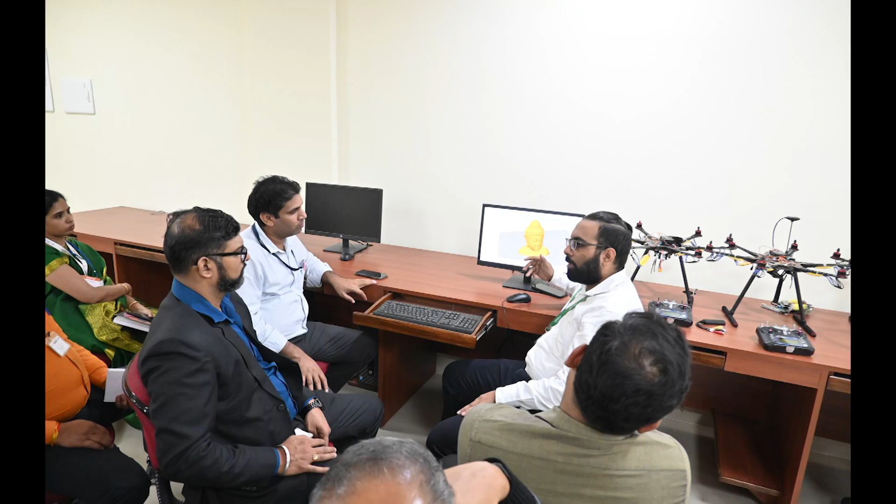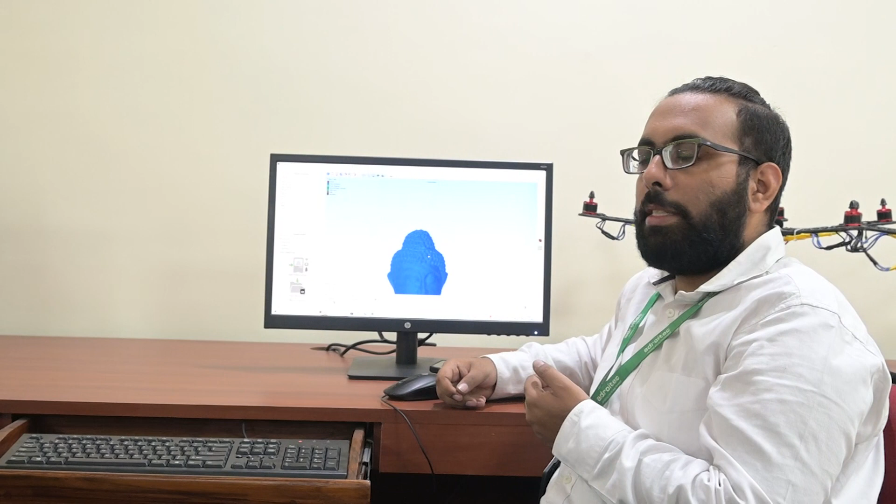मशीन में जो वायर फीड हो रही है, जनरली उसका डायमीटर होगा 1.75 mm, वो किसी भी कंपनी का हो, सभी इसी डाटा पे चलते हैं। एंड एट द सेम टाइम आपका नोजल का डायमीटर होगा 0.4 mm। क्यों? बर्नौली के सिद्धांत से, जब भी किसी चीज़ को पीछे से प्रेशर करते हैं वो छोटे डायमीटर से आउट होती है तो एक फ्लो ऑफ प्रेशर बनता है, अदरवाइज एक कंसिस्टेंसी फ्लो में नहीं रहेगी।

तो आपके पास एक ऑप्शन है मशीन टू मशीन, इस मशीन में 0.05 यानी 50 माइक्रॉन्स टू 0.32 तक आप प्रिंट कर सकते हैं। बेसिकली इसका मतलब ये 500 लेयर कंप्यूटर ने खुद डिसाइड की है। उसने कैसे किया, मैंने इसकी कैलकुलेशन बताई। हम लोग जानना चाहते हैं कि इसके लिए हम इनपुट देंगे कि डिजाइन में वो अपने आप से ले लेगा। अगर आप देखिए ये पार्ट है आपका।

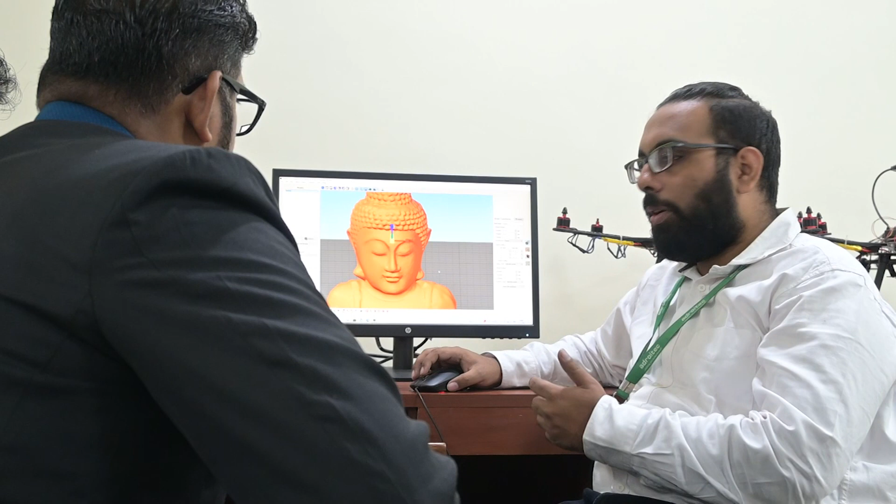जेड में ये कितना है सर? 90। ठीक है, इसको इन्होंने 0.2 से डिवाइड कर दिया, 458 समथिंग उतनी ही लेयर हाइट्स थी उसके अंदर। उसने उतनी mm की हमने लेयर हाइट दी थी, उससे डिवाइड किया तो उतना नंबर ऑफ लेयर्स आ गए।

अब मैं अगर इसको और फाइन में करना चाहता हूँ तो क्या करूँगा, यहाँ आऊँगा, मेरे पास ये लेयर हाइट का ऑप्शन होगा, मैं इसको सबसे कम करूँगा 0.05। लेयर हाइट कम होगा तो टाइम बढ़ जाएगा, पार्ट की फिनिश थिकनेस कम हो जाएगी पूरी लेयर की। अभी डिपॉजिटेड रेट तो सेम है, लेयर हाइट कम करने पे ज्यादा लेयर हो जाएंगी, करीब 2000 लेयर हो जाएगी।

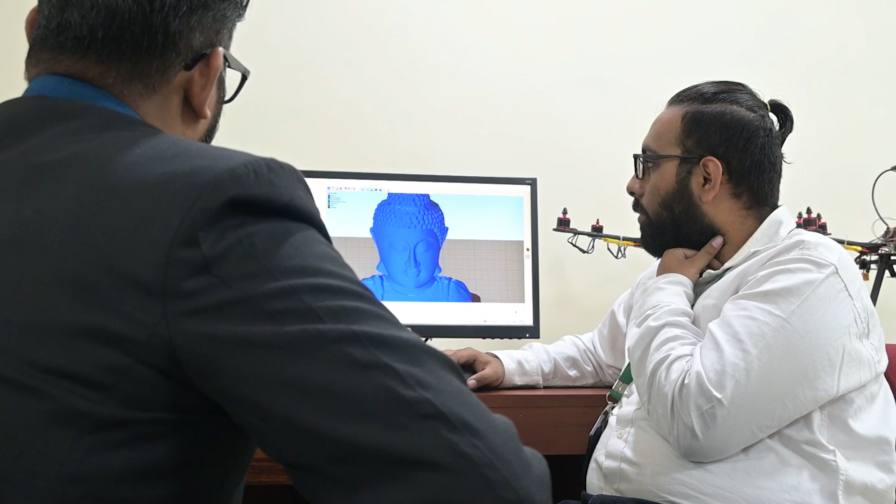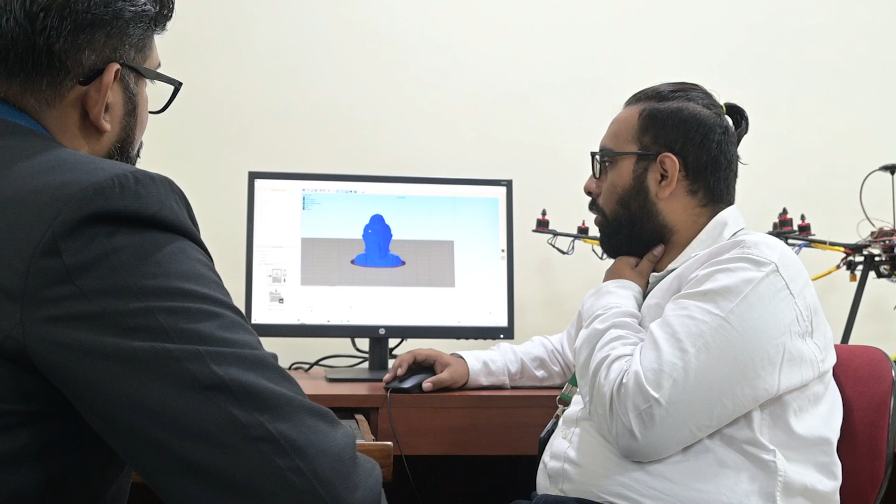मैंने थोड़ा सा वेरिएशन दिखाया। अगर इतना जल्दी करना है तो लेयर क्या है, अगर बहुत ध्यान से फोकस करके देखोगे तो आपको लेयर दिखेगी, अदरवाइज 2000 लेयर नॉट विजिबल तो लोगों को अच्छा लगेगा। बट अगर आपको सरफेस की फिनिशिंग डेमोंस्ट्रेट करनी है तो इसका टाइम कितना लगेगा, 17 आवर्स। तो आपके हाथ में है कि आप कैसा पार्ट बनाओगे, लेकिन इसमें टाइमिंग ज़्यादा लगेगी।

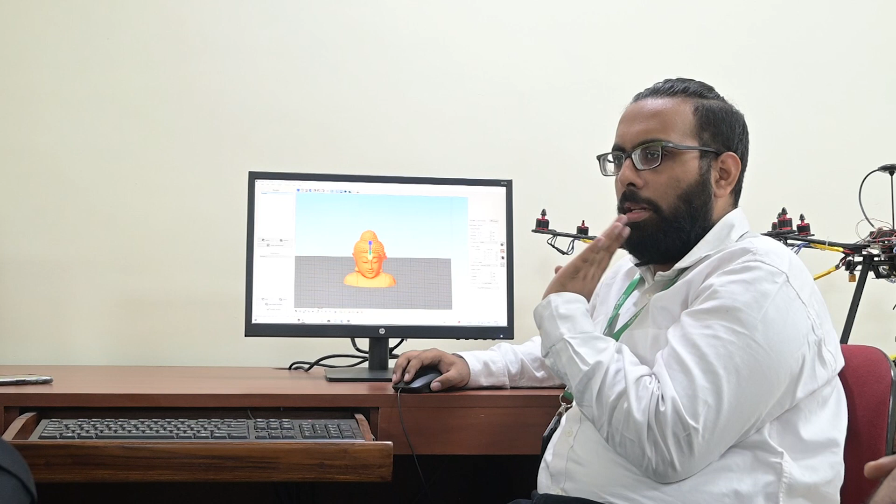लेकिन मटेरियल तो सेम इफेक्ट नहीं आएगा, मटेरियल सेम बस सिर्फ मशीन रनिंग कॉस्ट बढ़ जाएगी, थोड़ी रनिंग कॉस्ट बढ़ जाएगी और इलेक्ट्रिसिटी भी।

तो हम लोग ऐसे करते हैं 3D प्रिंटिंग में कि हम लोग एक ना बना के, मतलब इनिशियली फिनिश पार्ट ना बना के, वी विल मेक इट कोर्स। जब आपका डिज़ाइन फाइनल हो जाता है तब आप उसको फिनिश डिज़ाइन पे जाते हैं, वो हर 3D प्रिंटिंग प्रोसेस में सेम है।

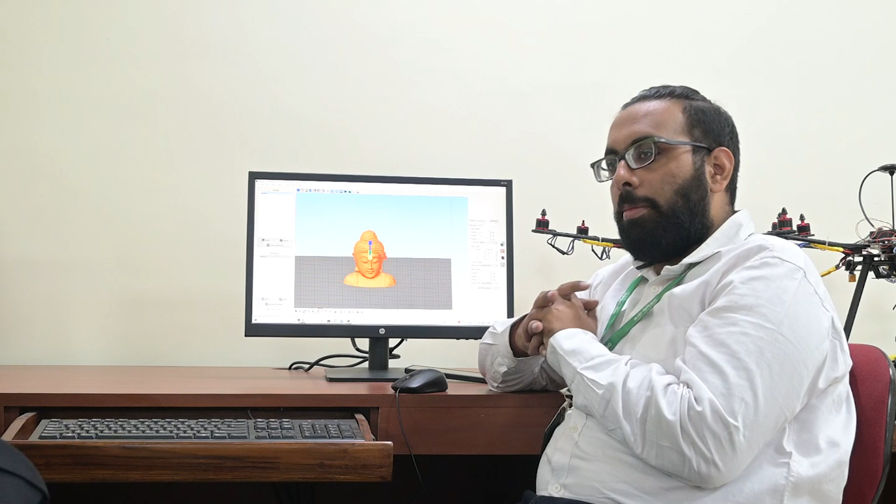हम लोग कोशिश करते हैं पहले जितना सस्ते में बन जाए, बिना ज्यादा पैसा लगे बन जाए वो बेटर है। अगर मैं अभी प्रिंट कर रहा हूँ, आप मुझसे कहते हैं कि इसके लिए माउंट बनाना है, मैंने नापा, मेजरमेंट्स करके डिज़ाइन किया, मैंने पार्ट शुरू किया, मुझे पता है अभी मेरा डिज़ाइन फाइनल नहीं है तो मैं महंगा मटेरियल यूज़ नहीं करूँगा इंडस्ट्री में, आई विल यूज़ ओनली चीप मटेरियल। वंस माई डिज़ाइन इज वैलिडेटेड, आई विल यूज़ कॉस्टली मटेरियल, आई विल मेक इट मोर टफ।

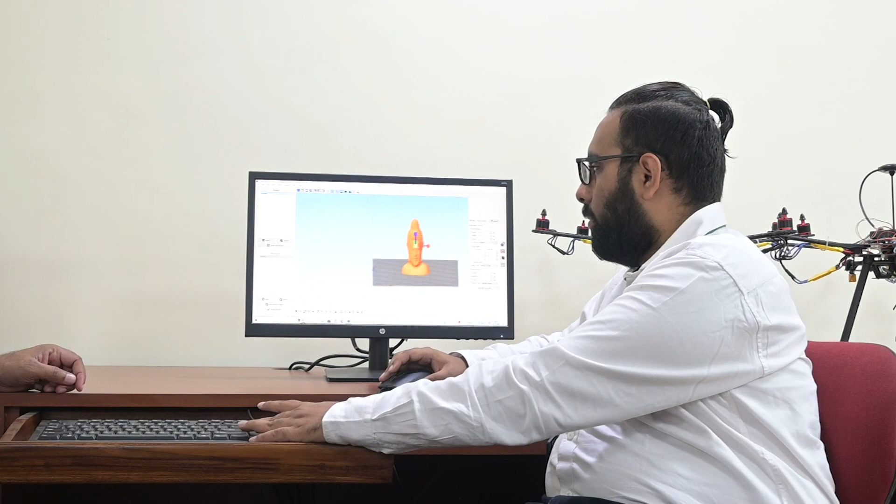इस तरीके से मेरे पास मशीन में एक ऑप्शन है कि मैं प्रिंट कैसे देना चाहता हूँ, मैं इसको रोटेट करना चाहता हूँ, मुझे ऐसे प्रिंटिंग चाहिए। बट अब इसमें इशू क्या होगा, इस पार्ट में भर के सपोर्ट्स होंगे, ये सारा पार्ट होगा।

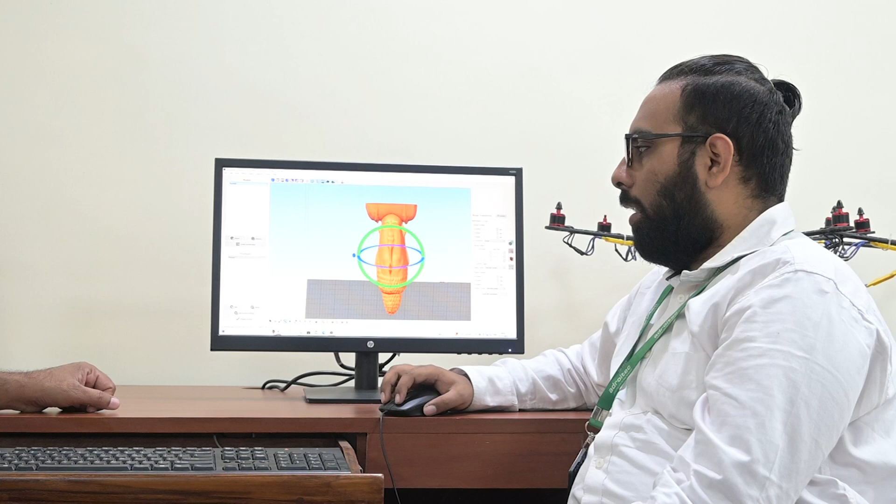सर ये तो पूरे जीरो हो गए। तो अगर मुझे नहीं पता कि ये लेगा या नहीं लेगा, मैं एक बार चेक कर लूँगा।

सर ये कुछ बिल्डिंग्स की उल्टी बनी होती है, पूरी बिल्डिंग, तो वो कैसे बनती है, किस बेस पे बनती है। रूफ जैसा जो बेस है वो रूफ जैसा बना दिया रहता है और ट्रायंगल शेप का नीचे होता है।

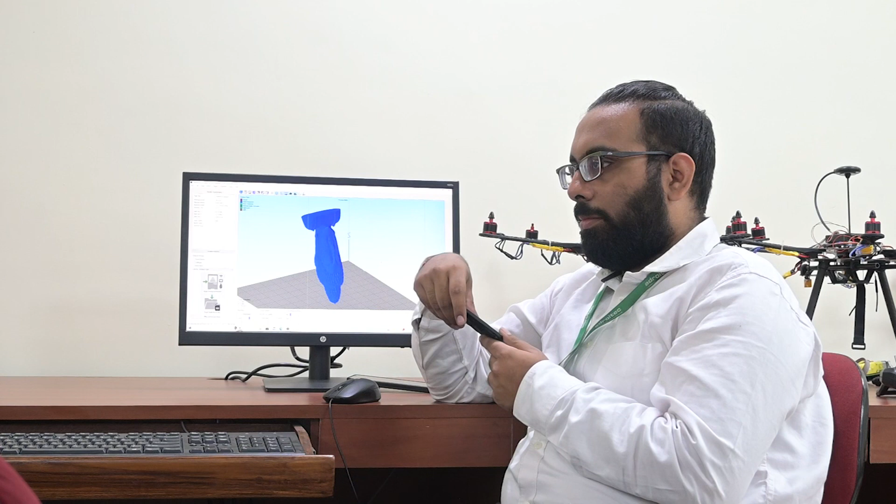Nowadays some softwares are there which will be helping us to identify the malfunction of the design over a period of time. So is it possible along with the current technology?

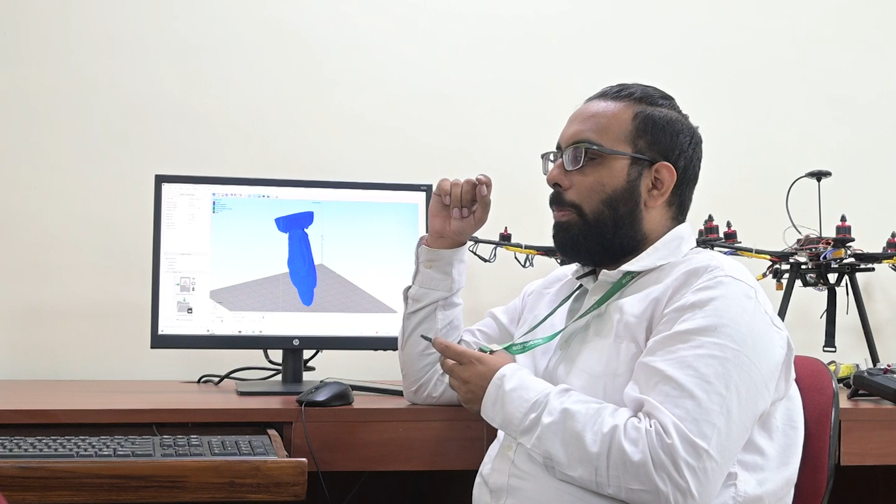Mam, 3D printing, yes it's possible. You should be aware of what the part's property is. If you can know the exact property of that part, generally when we print in metals, we print tensile bars, we print compressive samples, which you can test side by side to find its strength. If we put those values inside the software, we can get the same results, that this much pressure will be there on daily basis. So those software can predict.

Is it available with this structure? Not this one, but some softwares are available in order to identify the aging of this structure over a period of time. For that you require a lot of extra data. If something is conventional, there is some kind of data for that as well. But sometimes there are things which cannot predict anything. Example, if you live in Delhi, you know about that old British structure which may have gone through 2 times of its life. So softwares can predict, but for that you require accurate data for everything.

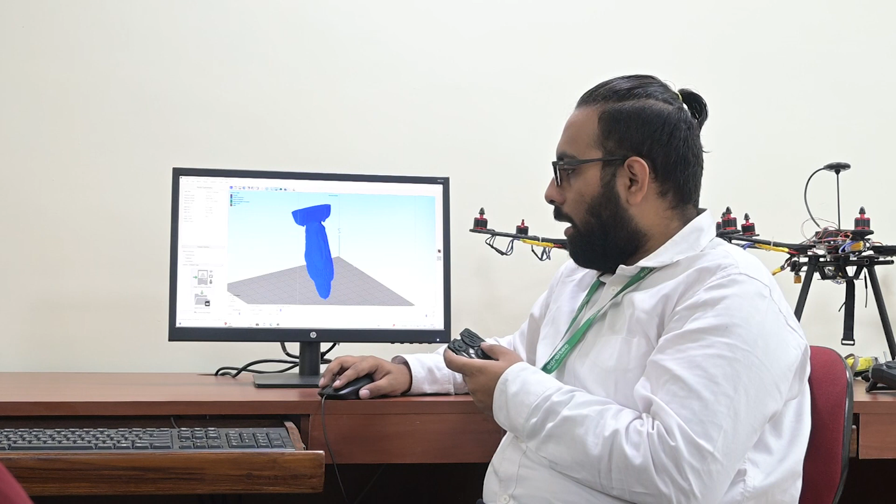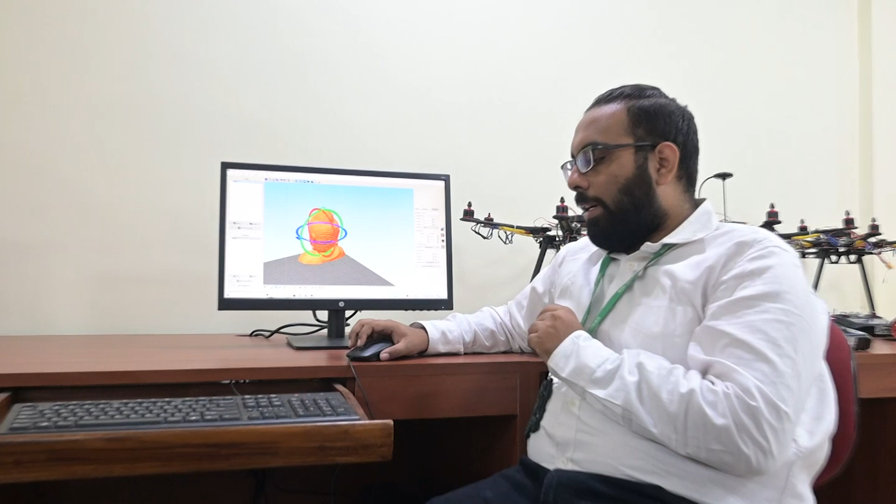If there is no documentation, then it's quite difficult to identify. In that case, for predictions you need tests to be done. Some case studies are performed where you have to sense, like if I will just click, I know I have designed this thing in such a way, how many clicks will it register? Like you asked, how will the software predict this?

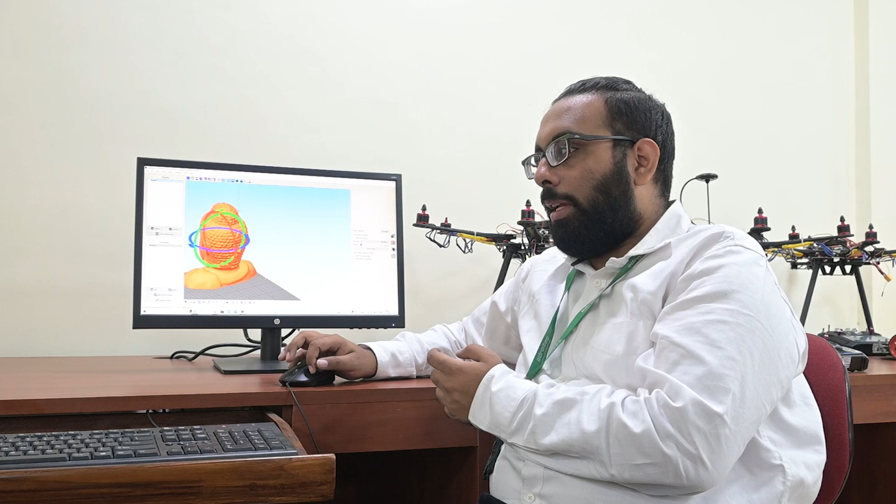So what the company may have done, they have made some robot which will only record everything. They will get the data, they know the vibrations and all. They know this mechanism will take this much clicks, they know this material will take this much of clicks. So as per those models, if they input all the data in the software and make a newer mouse on the basis of the same concept, they may get some answers, but they will do some kind of research work in that as well.

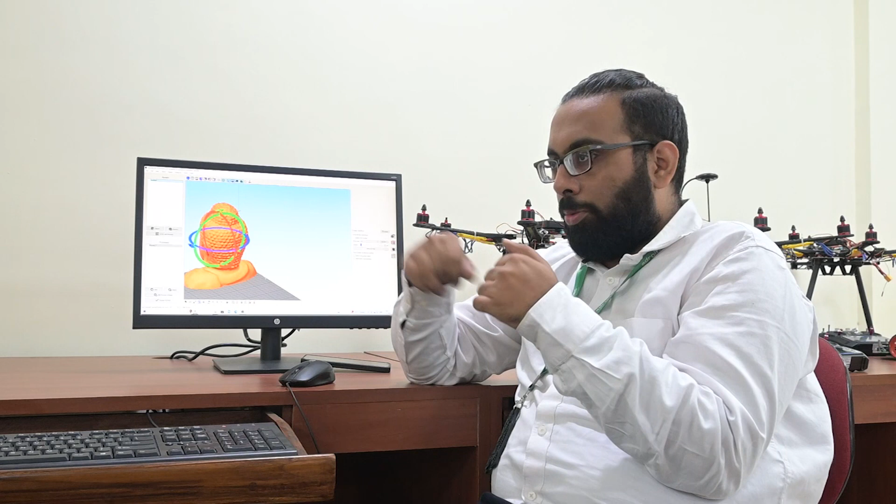If I give you an example, Burj Khalifa was made. So for Burj Khalifa, what they did, they designed the whole structure. Once they designed it, they simulated that they know this much heat is there in Dubai, this much wind blows, at this height it blows. They calculated everything and inputted that into a software, then inputted the structure they made. There is a very good documentary on how Burj Khalifa was designed, it's again based on the honeycomb structure design. They took all these things into account, did simulation, did worst case simulation that a tornado will come, and as per that they modified the design. So this kind of work is done.

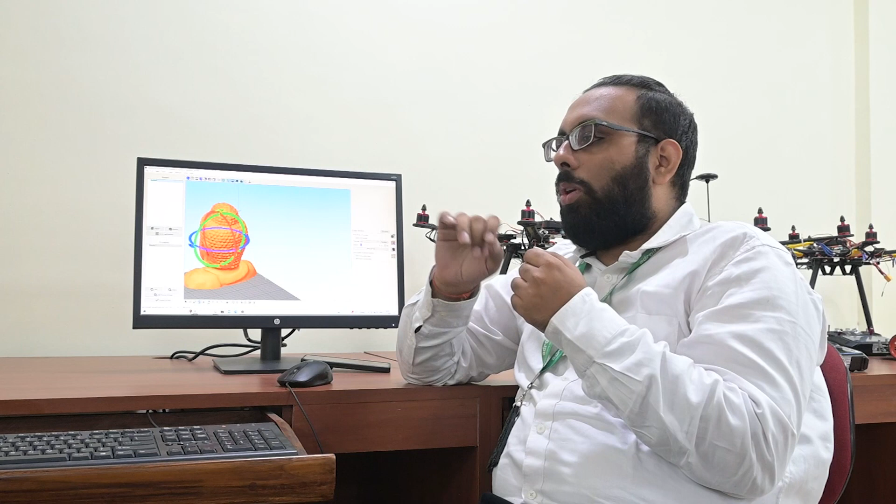In the case of basic designs, softwares like ANSYS are there, not in 3D printing but in mechanical, where if I want to calculate the load - we used to teach students the beam, strength of materials, in the SOM, we teach them this kind of beam is there, how much load it can bear, because that has been calculated previously. Generally not done by hand, softwares are there. You have to mention these things, that this kind of load is there. They may have done it once, got some results, input that into software, and now everyone is going to use those results.

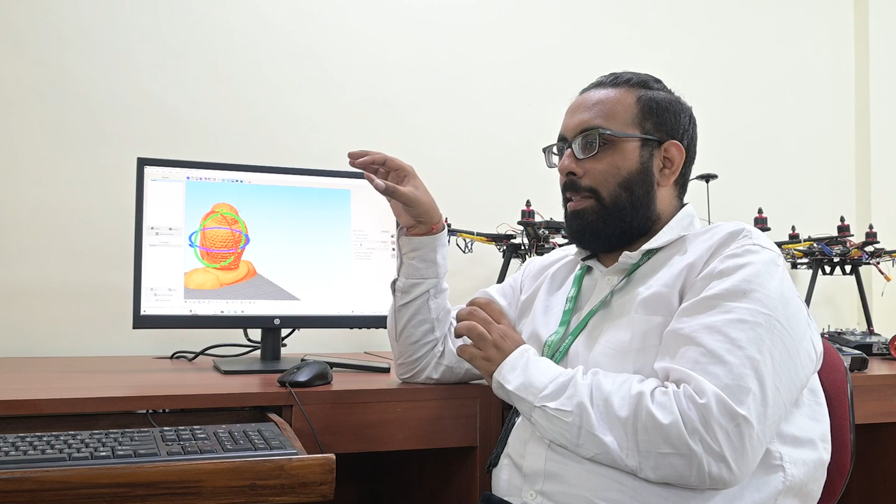So software can predict up to a mark, and once they made something, they will do their own level of testing, to check if those simulations were up to the point or not. So they can modify from them. So again, that can be done from 3D printing as well.

So just like this, we can make a file, we will put it into a pen drive, we can give layer heights. There is one command where, for example, you know this Buddha is there - in the case of Buddha, you are not going to throw it, you are not going to catch it. It will be just a showcase somewhere, so you do not require it to have a lot of strength.

You require finish, but not strength, so you do not want a lot of infill material. You can control that in the part, from making it a solid part to making it hollow. You have flexibility to do that on your own. If I come here, I can give infill. I have an option to increase the infill percentage. I can make it solid, I can make it hollow. Again, it's in my hand, so I can do that.

I can give temperature for the part. I can make supports. I can control speed. So everything for a part you can do using the software.

You learn this once you start doing it. It's not a very technical thing. If you see these settings specifically, you will see there are a number of settings. Some people get scared, but the thing is you do not have to play with a lot of settings. You just need to first select the material.

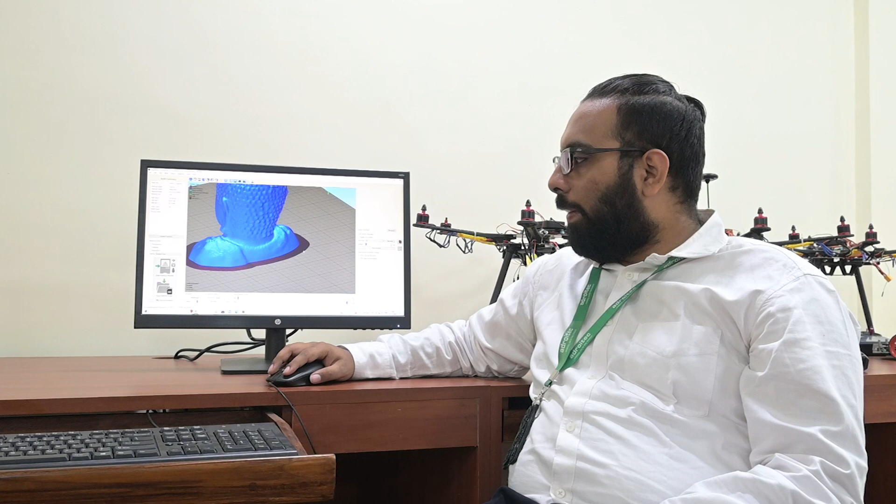Any material will shrink or expand according to heat or coolness for the part. So sometimes you require to give some kind of anchoring to the part. Let me give an example with this part - just look very closely at it. You see there is one extra layer of lines which comes. What is it doing? It's creating some kind of base for the part. If any kind of contraction or expansion happens, that will be taken care of from outer to inner, not inner to outer. So in that case it will shrink, and at a certain point the shrinkage will stop - because there is no room for movement. So the part will not get detached from the bed.

So I need to just have a file. I will import the file inside the part in the software, and by giving 3 to 4 commands - one command is first of all layer height, again it's in my hand - what kind of layer height I want to give. 0.15... 0.2 is the standard layer height which will give you optimum results.

This is in mm. It's written also. Okay, after that, addition - generally brim is okay with some layers of lines. Some different materials require a different kind of addition, like there is one called raft. I will click on it once.

Now what has happened - the part has some extra layers which should not be there. So what is it doing? Some material, just like ABS or PETG, may require more addition. This will not work for them because they have a higher temperature difference. So this kind of addition will be with the part, and this can be easily removed once the part is printed. This is not permanent.

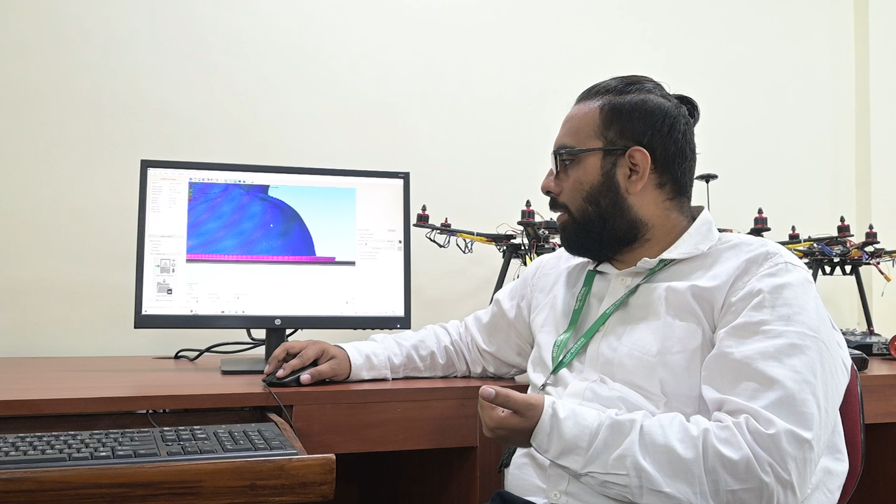Even if you see this very closely, you see there is a tiny area - what is this gap doing? This is making it a little bit in the air, so when I want to remove it, I can just pull it out.

After that, infill is there. Again, remember the setting is there, no need to work on it. Just select the infill percentage, and by changing that I can change the density of the part.

Support - if I want to change any settings from the support, I can do that. But if I want to give support to a part, there is this option, auto support. Once I click, the machine will create the supports automatically.

Adjacent to that, I have an option where I can give manual supports by hand - something like this, something like this. Again, adjacent to that, I have remove supports. If I click on it, it will remove support.

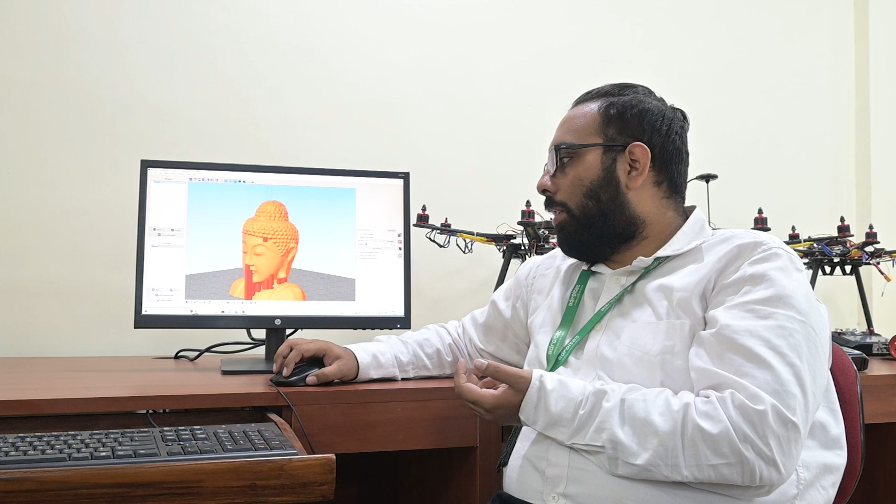Then there are two other options. Right now I have to click once for one support. Now if I just click and let it move, it will create a number of supports for me. Similarly, click and then move. And if I want to remove support shortly...

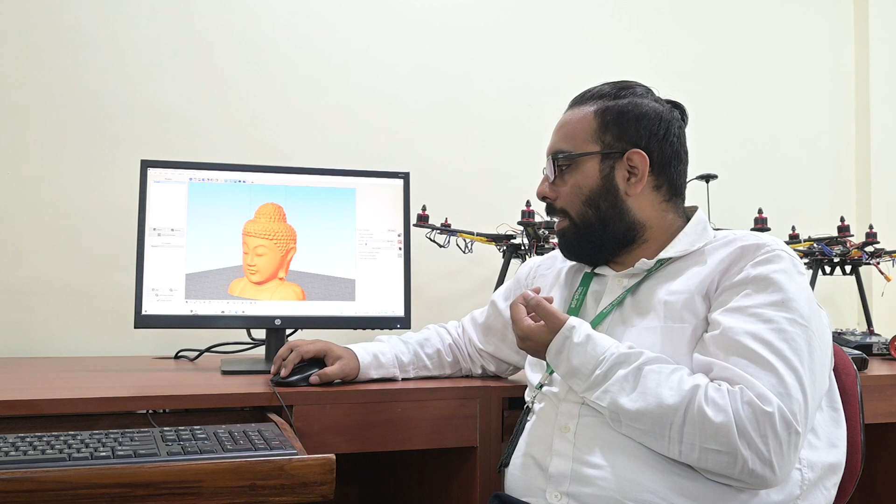You do not have to do a lot of things. If you see, since I am well versed with 3D printing, I know this part doesn't require supports. There's a chance some areas like the ear or chin may not have a good finish, a little bit, but that doesn't matter sometimes. The whole part will be perfect - the chin area doesn't make that much of an issue.

But the part we are printing now is without support, so it will support itself, it will set itself, if it is required. Yesterday we were discussing: if it is less than 45 degrees, it will need support taken by itself. If it's more than 45, it doesn't require support - the software won't take it by itself. No, software will never take it by itself. You have to come here and click on it to create supports.

But where these supports go is decided by the software, and its threshold is 45 degrees - even not 45, 49 degrees. If you see, we can even change this. So by this method, it is up to me whether I put the support or not put the support. Yes. So it's again an educated guess.

If you do not know whether this will need support or not, go to layer view. Once you go to layer view, I can check it layer by layer process. Like how - I will come here, I will grow the part.

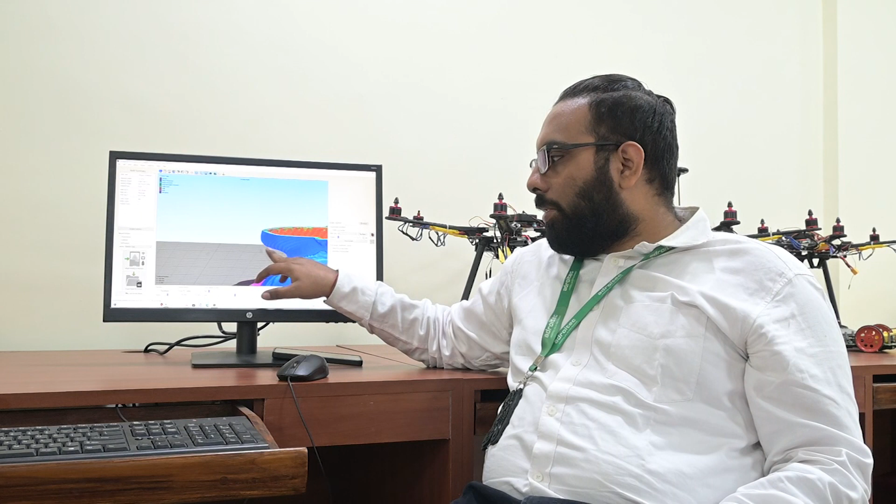If you see, this area is above 45 degrees until this point. After that, it's more like 30 or 35 degrees. So in this area, I know this will make some marks, which is not good. I want to give support, I can give that, but the supports will also give a mark and I have to remove it, which will increase the time. So again, it's on me.

For this specific model, I choose not to give support because I have printed it without supports in the past. So again, it's trial and tested - until unless you destroy 2 or 3 parts, you will not understand how it's done. This is the reality.

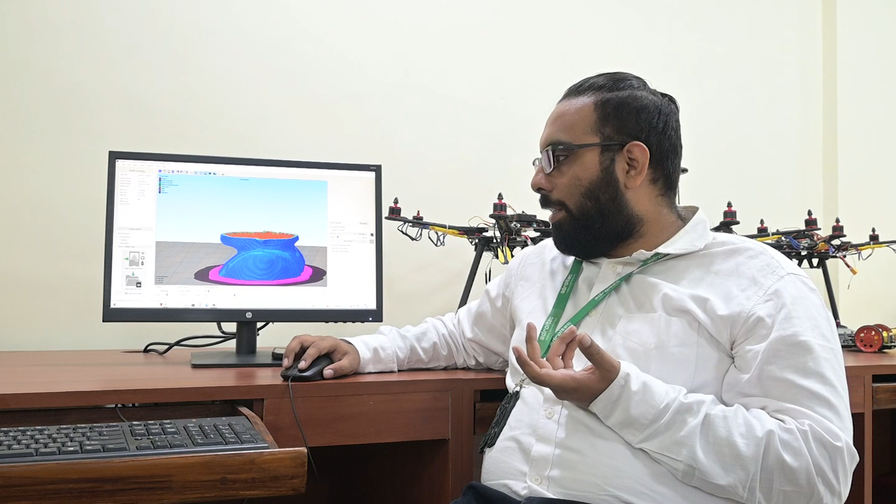But if, for example, this part originally is in this orientation, check this part - first of all, the software will say that it requires support, which means it also gives its guess.

One option is auto support - it's the same, auto support is an option where it figures out where support needs to be given. Now see this, it gives directly. As per the machine, this part will be printed without any issue. But do you think this kind of part can be printed in any case?

I will again check the layer view. Okay, see this. Can you see this? It's literally printing in air. These are things you have to be aware of.

And if this is not printed properly, how do we expect the full part will be printed properly? Is the peak portion this one? Yes, so this is the raft I told you about - adhesion, a type of adhesion. Foundation is this, so it will be created by itself.

Yeah, we have given it. If I just untick it - check. So that is for adhering the part to the bed plate, nothing else. That will be easily removed afterwards.

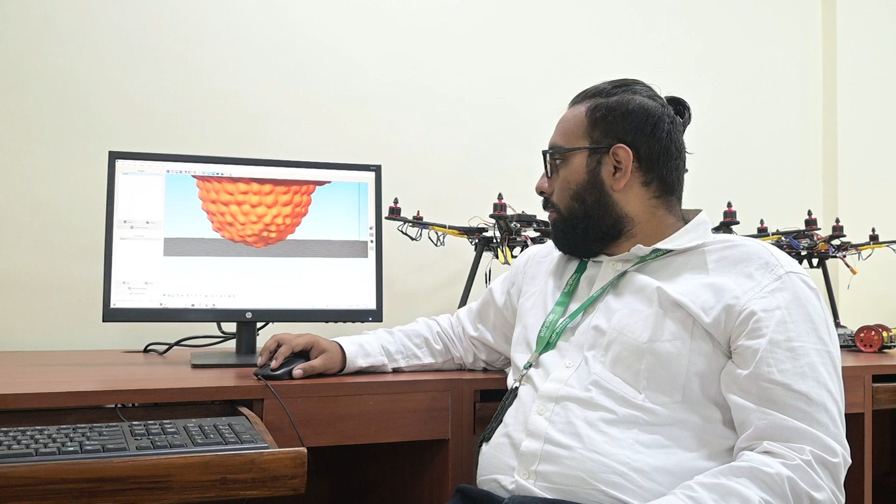Okay, so after that, the other settings are adhesion, infill, support, temperature. Generally every single material has written on it which material will be printed at what temperature.

We have made these settings before, like by hand. If I just click it, I have changed it to PETG, then the temperature changed. If I click on any other material like nylon, it will have a different material setting. Generally it's written on the spool - if you check the material, it's written on the spool. Otherwise everything is fed into the system.

Okay, cooling - this is something which I didn't discuss yet. Some materials tend to melt too quickly, so they also require cooling.